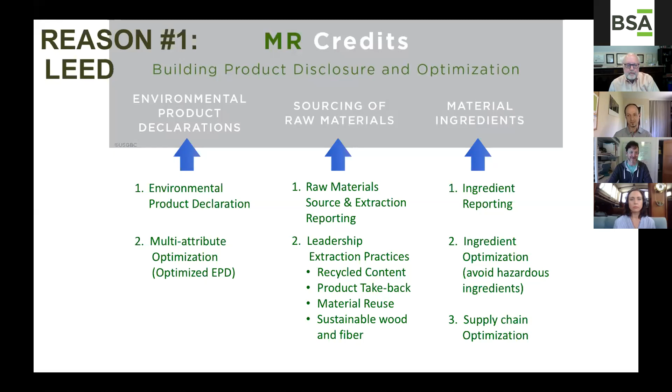Collect those EPDs. Used to be 20 products—you had to get 20 products that had EPDs to get 1 point. They've actually lowered it down to 10. This is like the easiest point to get in LEED. So the number 1 reason, you can get a really easy LEED point. So collect those EPDs. That's this, if we look at our building product disclosure and optimization credits.

So I was the chair of the MR tag for LEED after the V4 launch, so we were the fix-it tag, trying to fix all the credits that didn't quite work. So version 4.1, a lot smoother, even easier on some of these. We want to make sure a credit that no one actually uses doesn't change the world, so we had to lower the bar on some of them.

So this bar right here, above that is your transparency credits. Below that is your optimization credits.

Environmental product declaration is the one where you just have to collect the documents. You have to know, and Chris will talk a little bit about this, whether it's for the whole category, or whether it's product specific—is it for ceiling tile in general, or is it for Armstrong brand ceiling tile? The latter being the product specific.

Now, the interesting thing was, if you look at the progression of LEED, environmental product declaration really in most ways replaces a lot of the old materials credits, which were then packaged all into one single point. This used to be like 4 credits in the old LEED 2009 version. It is now 1 credit, and it's really more about how the resources are extracted. It's not trying to be, which it used to be, a proxy for environmental footprint. We're now using LCA as our environmental footprint metric in the EPDs.

And recycled content, this is more about where do the materials come from, where are they going, sustainable wood and fiber. Environmental product declaration is really where we should be looking for this question: is this a low or high environmental impact product?

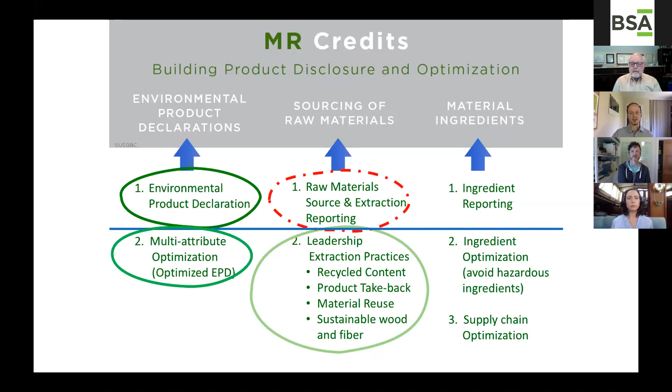Reason number 2, I said I was going to give you 3 reasons. This one is really looking at it from a manufacturing perspective. If you just produce the EPD to check the box for your customer and say, oh well, we got you your LEED point, go away—you are missing the biggest return on investment you could have, which is that doing LCA and doing the process of publishing your EPD creates some accountability if someone ever reads your EPD, which Chris will get into how and why not to do that.

But you should, if you do this right, this could be a huge source of value, because you know you have to do something about carbon now. You know you have to do something about the environment. Every company does. Where should you spend your money? Where are your hotspots of impact? What's the elephant in the room for your category?

If you make a car and you don't address fuel economy, but you make it out of recycled materials, you're really missing the hotspot. And for the most part, if you look at a product like ours, we make a thing. So talking about things versus machines is a really useful rule of thumb in LCA. A thing doesn't particularly use energy during use. So we make flooring, it sits there. You have to vacuum it, you have to sweep it. A little bit of energy resources gets used on that—not a lot, not compared to a car, where there's a huge amount, or an HVAC system, a huge amount of resources happening in the use phase.

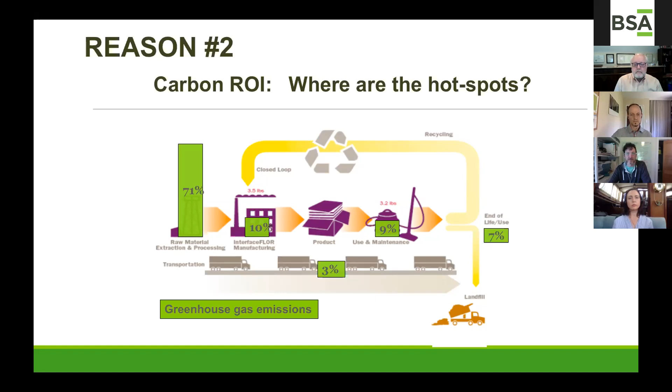So reason number 2, we're really talking about getting your return on investment. Focus your attention on where in the supply chain, where in your footprint you actually have the biggest impact. It means changing out, for most things, what you make your product out of. If you can't address the raw material sources and fundamentally change those, you're probably going to miss most of your impact.

This is the obvious one, and I'm going to frame it a little differently. This is the EPD, where you find a product's impact on climate change. And the trick here is we will get into some really dry stuff, especially when we get into the guts of LCA. And this is what needs to get you through emotionally: this really matters. This is where we find out what impact do we have or not have on climate change.

Because climate change is not just this abstract, oh well, we're gonna have some sea level rise and some hotter weather. It turns into, when you really run this experiment through, the biggest challenge to public health in the 21st century. CDC, World Health Organization, Harvard School of Public Health, whoever you ask, you can Google it - the #1 threat to public health in the 21st century, in spite of the global pandemic we're in, is still climate change.

Because it makes all of these other things worse. It affects so many things, it affects everyone. And then, of course, the other really important thing to consider is it doesn't affect everyone equally. It affects the most vulnerable people who can least afford to be disrupted by extreme weather or new disease vectors or failure of agriculture. It does not affect people equally.

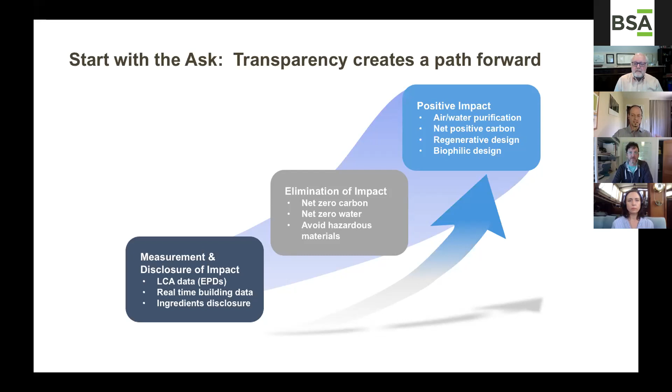Because what these details start us on—if we look at LCA, something as a little bit dry as LCA data, start to get this disclosure in our EPDs, we can actually get on a path to designing the world we want. We can get to, let's eliminate, we know what those negative impacts are. We've got the EPDs and other tools. We can reduce the negative impact, but then we can really start to, in a grounded way, work on designing spaces and buildings that have a positive impact on the world, where we are actually storing carbon in our building. We are purifying water. We are producing more energy than we're consuming. We're creating habitat in our buildings. But it has to start with transparency and a real assessment of where we are now, which is one of the key things that LCA enables.

So EPD, we're going to dig into—these are wonderful slides that I borrowed from Terry McGusky, who presented this at the American Center for Life Cycle Assessment Conference. It's a truly deep dive into life cycle assessment, which is now taught at just about every university, come a long way in the last 25 years.

So you'll see in LEED documentation and other places, it has to be a product-specific type 3 environmental declaration. An EPD is by definition a type 3 environmental declaration. You don't have to ask for your EPD to be type 3—an EPD is a type 3. And type 3 just means it's not a green claim. It's not like '30% environmental,' it's not like 'certified to meet this standard.' Those are type 1 and type 2 declarations. A type 3 just means we're going to give you all the data in a standardized format. It doesn't actually make any claims. It's not more environmental because it has 'environmental product declaration' in the name. It just is fully disclosed data according to life cycle assessment. That's all type 3 means.

So steps to create an EPD—there is a much deeper dive if you are working with manufacturers closely or work for a manufacturer, I can give you the full detail on this. But essentially I want to define the key terms so you know when you ask manufacturers for EPDs, which as designers is one of the key things we really need you to do right now. If people don't have them and they're not on this journey, they need to start tackling LCA, understanding their hotspots, transforming their supply chain. But they can't do that if they don't actually have the data. And you can't assess their product if they don't have an EPD. So keywords here: we need a PCR, we need an LCA, we need an EPD.

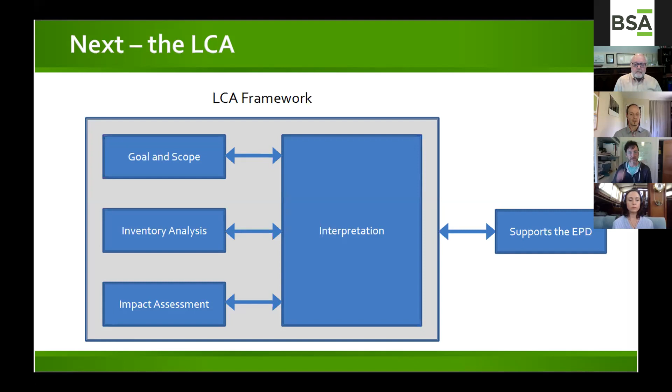That's where tools like GaBi and SimaPro, these other things, come in - the better tools have really good data sets, saying, well, here's what an average North American vacuum uses. Then the product category rules define what the maintenance frequency is for that product. So using this data for what the emissions from powering a vacuum are, I'm going to say it's once a day, and then we multiply that, and that's your impact for maintenance.

So you can see you have to layer in the data set - for instance, we say, okay, we use this kind of plastic, here's a data set from the production of this kind of plastic in your region. Ideally it would be from your plastic supplier, but a lot of people - and this is where we as manufacturers have to do the same work of asking for LCA from our suppliers that designers need to do - need to say, I need your actual data. We've done this with our suppliers, and it makes a big difference where we suddenly realize their hotspots, which become our hotspots. Okay, so your recycling machine is actually on a coal-fired power grid - what can we do about that?

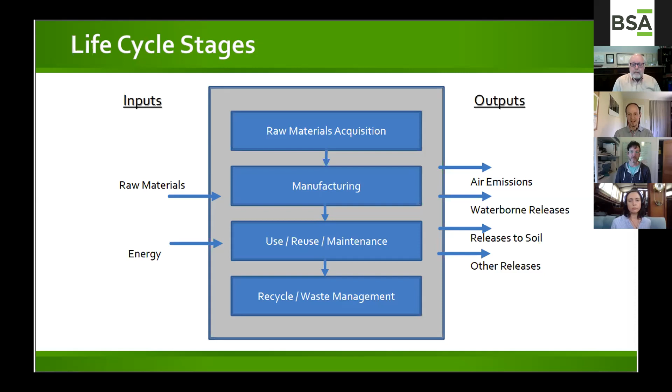Mikhail, two minutes, thank you. I'm running behind as usual.

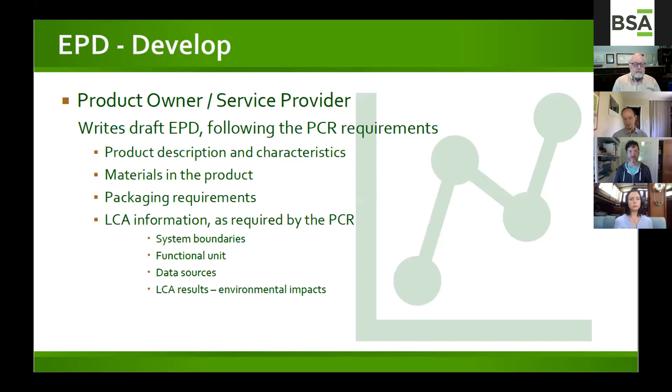Anyway, so PCR informs our LCA. Then EPD is really the format in which it gets published. You can either, as a manufacturer, do this yourself, or hire an outside consultant to do your LCA. You always need a program operator to publish this, and they're going to make sure your LCA has been verified, ideally by an outside party, but you can also have it done by an LCA person internally - obviously it's better if it's an outside party. So hopefully these concepts make a little more sense to you now. The PCR is necessary to link an LCA to make it comparable, and the EPD is where it all gets published in a standardized format.

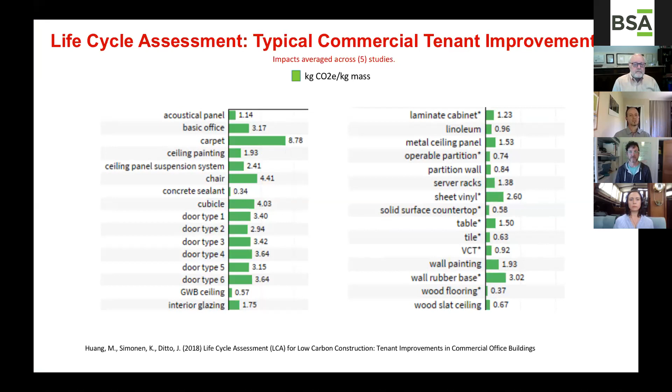And all of this enables us to actually start to look at building products and say, okay, what has a higher footprint? This is a great study that Carbon Leadership Forum did, averaging material footprints across five tenant improvement projects. You can look and see, oh wow, what jumps out at us here in terms of carbon footprint? Okay, carpet - I'm going to pay attention to that. Then we can go and look at EPDs for carpet and say, alright, this could be high, so I need to make sure to really pay attention within EPDs. This is the kind of thing EC3 can hopefully help you with, so you won't have to read 20 EPDs and say, wow, some products in this category are really quite low and some are quite high - let's pay attention in this category.

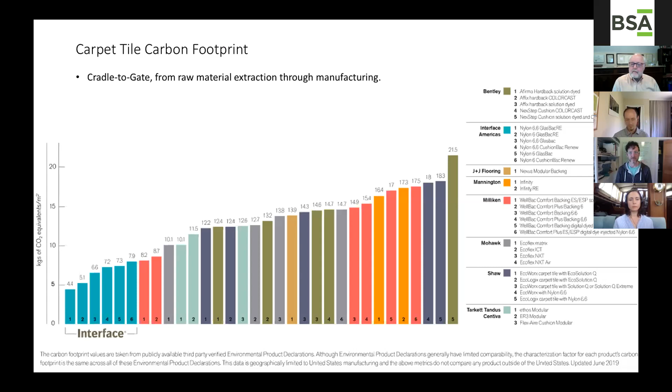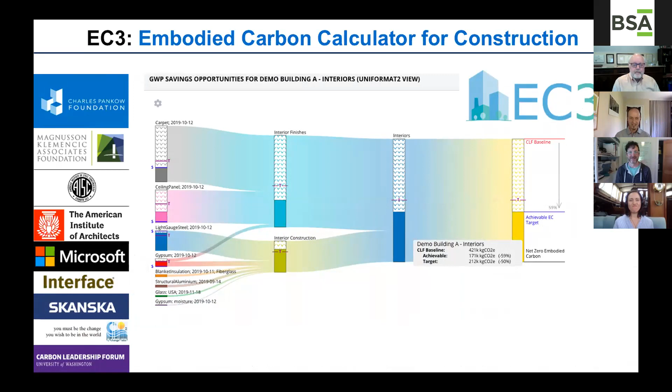So EC3 - if you are in the 9 product categories that are open in EC3, this can help you with that final stage of product selection so you don't have to read EPDs. Because ultimately, as a designer, that's the thing you want to not have to do - read EPDs. Chris is going to give you tips if you do decide to be that brave person who does. But all of these sponsors have realized, wow, we really want to not read EPDs, so we're getting lots of good sponsorship and partners for the EC3 tool, because it enables that process to be automated, and all you get to see, as Stacy pointed out last seminar, is what's better than what - for the product I'm specifying, where are my low, medium, and high carbon options? So buildingtransparency.org - if you haven't played with the tool, do.

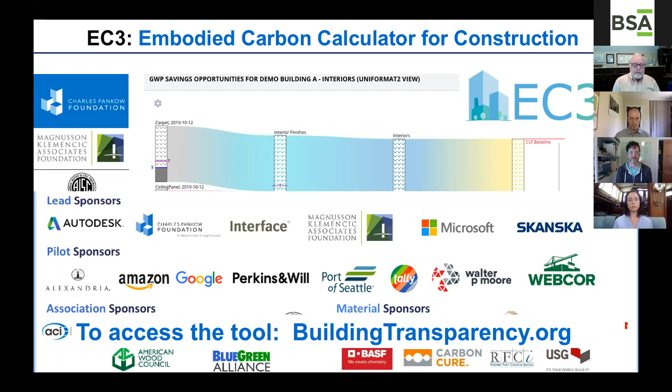This is another one I'll quickly show you, the qualitative version. If you really aren't going to tangle with EPDs, you can still reduce embodied carbon using materialspalette.org. There's only certain product categories they've given guidance for, but some key ones, so you know your general rules of thumb, spec this, not that. You don't know numbers, but you can at least get qualitative guidance and get them going in the right direction to reduce embodied carbon.

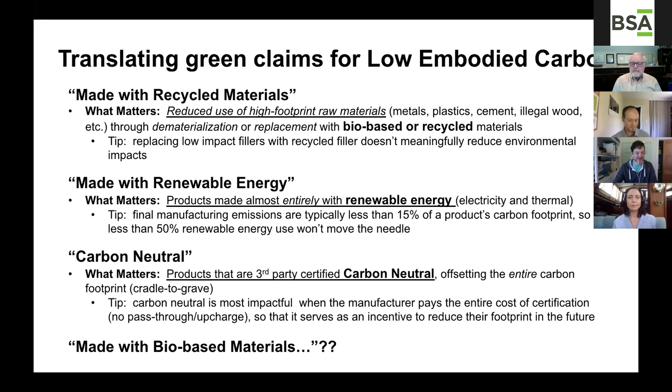Okay, thanks, Mikhail. That was great. You left me in a great spot, so I'm excited to take over.

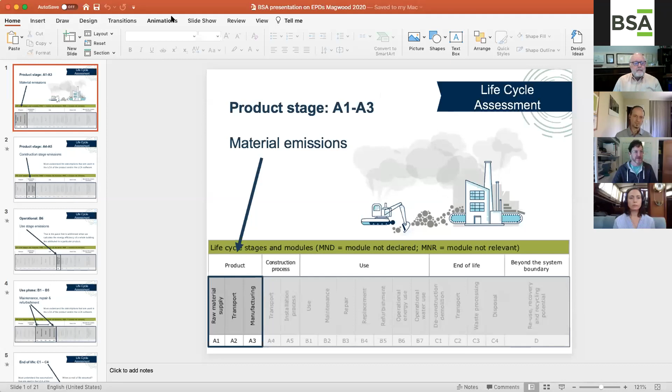I think you have to stop sharing your screen though in order for me to share mine. I believe that I did - I did hit the button. We might have a little delay. Okay, there we go. Is that coming through for everybody? Thank you, yes, terrific, okay.

So I have a set of slides, the first of which I'm going to go through fairly quickly, but to give everybody a grounding on what information you'll find in an EPD. So like Mikhail said, an EPD is a way of reporting the results of a life cycle assessment. The life cycle assessment does what it says - it looks at the entire life cycle of a product.

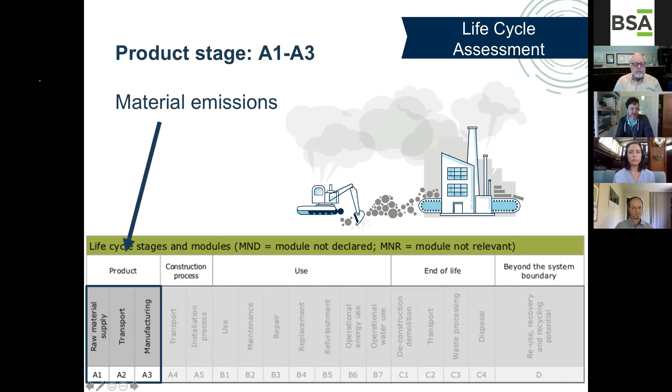Within the EPD, the various stages of the life cycle of that product are reported on separately, so you can compare not only the total number for the whole product, but by phase. They're broken into categories. The product stage, cradle to gate, as Mikhail said, known as stages A1 to A3, is raw material supply, transport, and manufacturing - basically the material emissions. That's the piece Mikhail pointed out as being quite large, especially the raw material supply portion.

Then there's construction stage emissions, known as A4 and A5. This is what it takes to transport those materials to your job site and the emissions associated with actually building the building - whether that's running diesel generators, running cranes, those sorts of operations, that's included in A4 and A5.

The one thing I want to point out is that the product phase is relatively straightforward to assess in an LCA, because those manufacturers all along the phase have pretty good data. You can collect quite sound data on the raw material supply, the transport to the factory, and what goes on in the factory.

When you get to A4 and A5, an LCA has to make a lot of assumptions. For transport, it has to assume where the factory is, but you have to generalize about the average distance it might get shipped. If there's an installation process, they'll assume you're doing it with a certain kind of equipment, or that it takes a certain length of time. So if you really want to do a good analysis for yourself, you want to understand what the assumptions were in A4 and A5, to get a sense of whether you'll have similar impacts to what is being assumed here.

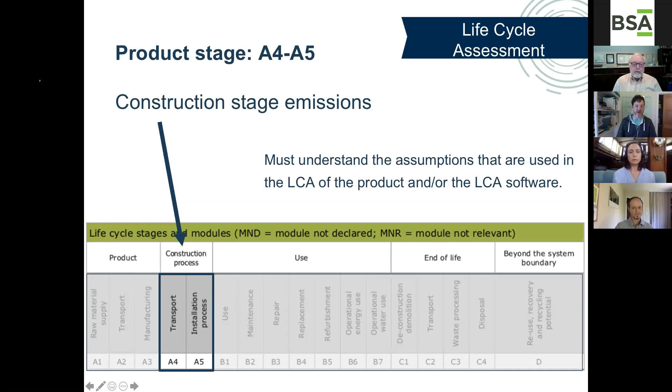There are use stage emissions, and when we're looking at just products, comparing different products, the operational energy use isn't really part of that. In Mikhail's example, the carpet doesn't have an operational impact. You don't heat the building more or less because of the carpet. The carpet doesn't require any operational energy over its lifespan in the building.

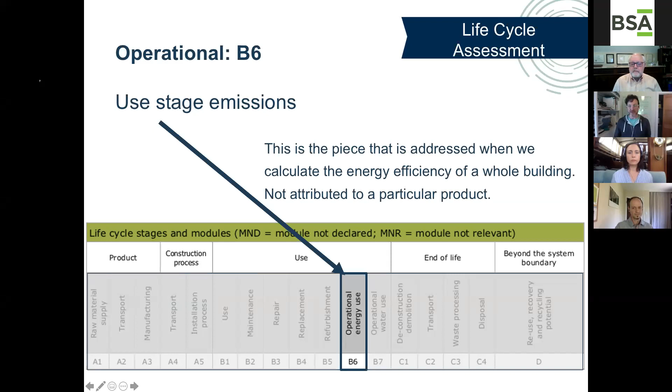So when we're looking at products, we're excluding the B6 category. What we are looking at is B1 to B5 - that's use, maintenance, repair, replacement, and refurbishment. You do want to understand what the assumptions in that life cycle assessment are - everything from how often maintenance happens and what kind, what the repair cycle will be, how often the product needs to be replaced. All of those things are going to be based on reasonable assumptions, but they will be assumptions.

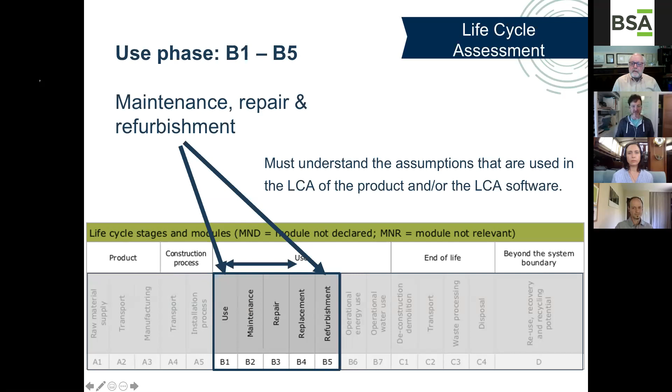So if you want to understand what you're seeing in this EPD, you'll want to see in the guts of the EPD what those assumptions were.

Same goes for end of life. First, an expected lifespan will be attributed to the product. Then C1 through C4 looks at what happens at the end of life - the emissions associated with deconstruction or demolition of that building or material, the transport of that demolition material, waste processing, and disposal. And you'll see this is starting to become a bit of a habit, but again, there are a whole bunch of assumptions built into that life cycle assessment.

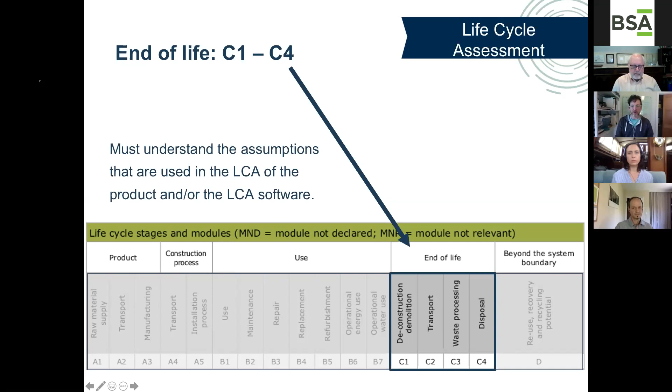For instance, whether materials are going to go to landfill, whether they're going to be incinerated, whether the LCA is attributing a portion to both of those means of disposal. So there's a lot to know there too, if you want to be able to compare.

And then finally, there are beyond-the-boundary impacts, largely to do with impacts from recycling and reuse. A material that is able to be recycled is, say, offsetting the need for more virgin material, so it'll be given a credit at the end of the boundary system here.

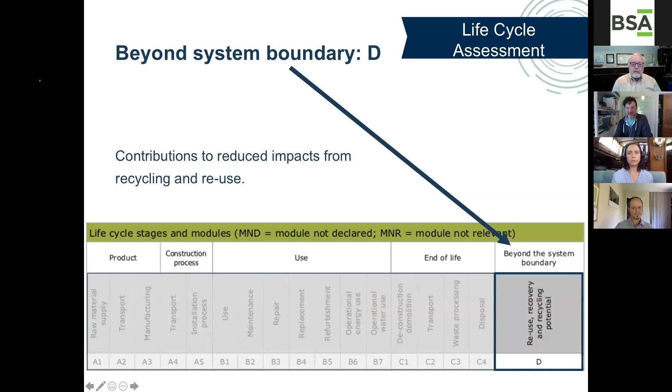I went through that because it's really important that you understand as a practitioner what part of this scope you are trying to compare for your analysis. So if you're looking at an EPD, is it to understand your product level impacts? Is it to understand your use level impacts, your end of life impacts, all of them together? Do you want to be able to weigh them out separately?

You need to know that because you'll find some EPDs only cover A1 to A3. So if you're looking at that EPD and comparing it to one that has A, B, C, and D all shown, you can really only compare A1 to A3 between those different EPDs. Understanding what you want out of that assessment and what you'll find in the EPDs you're looking at, you want to make sure that all of that aligns so you're scoping this properly.

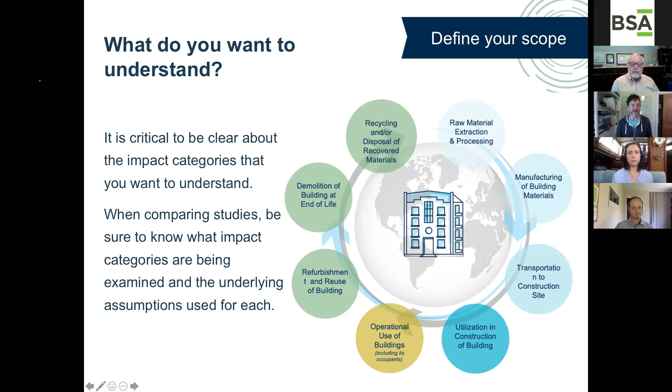So Mikhail sort of explained what an EPD is. From the climate point of view, when we're looking at a carbon analysis of a building, we're looking at the global warming potential, or the GWP factor. That's one of 7 categories that are assessed in an EPD. So if you're thinking about climate change impacts, you're really only looking at one of 7 ways that these products are being assessed.

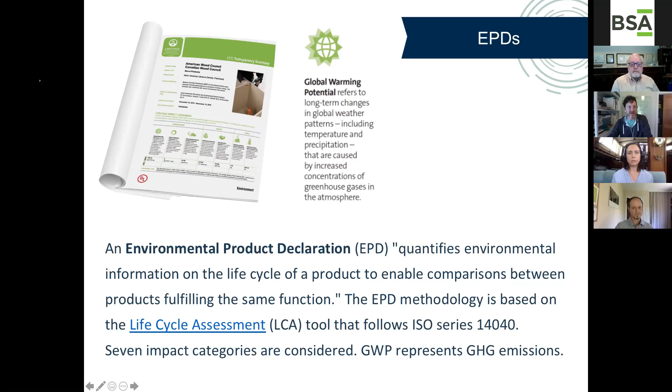And again, Mikhail mentioned that EPDs are third-party verified, and that there are program operators who do this for manufacturers. There are a bunch of them in North America and more in Europe and other places in the world. And if you're looking for these EPDs, in addition to places like the EC3 tool, all of these providers usually have a database on their website so that you can search out the EPDs that they've done.

So if you actually decide to wade in here and start reading EPDs, the first thing to look at when you see the document is whether it's an industry-wide EPD or a manufacturer-specific EPD. A lot of what exists now in North America are industry-wide EPDs, and the one you can see here is North American Softwood Lumber. This is both the American Wood Council and the Canadian Wood Council, who collected data from mills all across North America and presented an average for all softwood lumber everywhere in North America.

And so that in some ways can be really useful because it can tell you a lot about wood as a whole product category, but it's not particularly useful at directing you towards which wood might be better than other wood. This is sort of giving one number for wood in general.

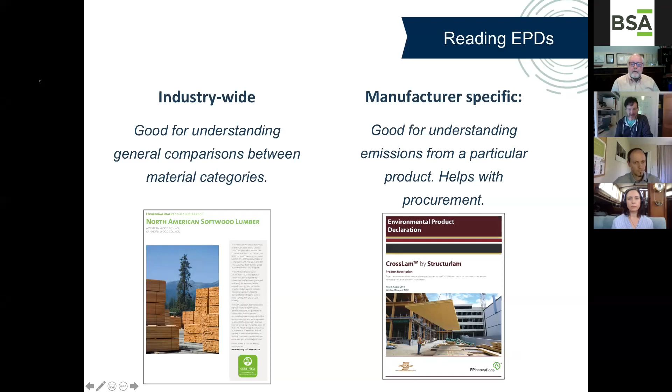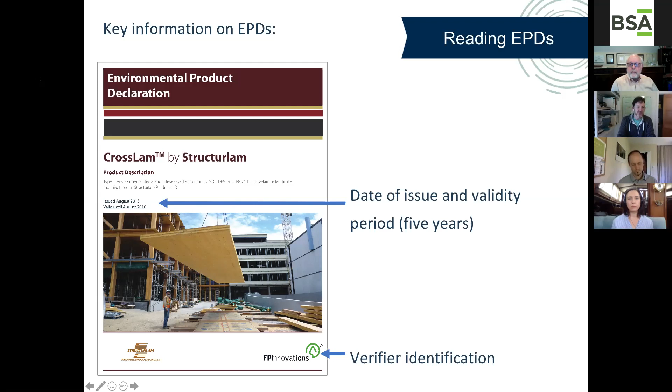So some key information when you're looking at an EPD: first of all, they have a 5-year validity period, so you want to check the date. You'll notice the one I'm showing you is actually an out-of-date EPD. Because there was a flurry of these done in the early 2010s, it's not unusual to find a bunch of out-of-date ones, but if you see that the date has passed, you can try to look for the more recent version. And the verifier identification is usually front and center too, so that you know it's been done by a reputable party.

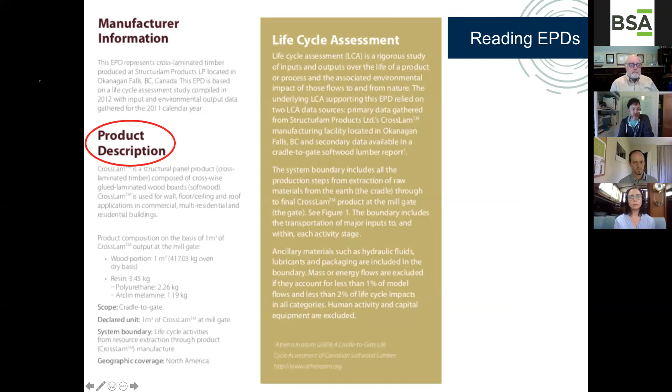Okay, so within the EPD, there is a product description that tells you where that product is used and where it goes. It gives you the scope of the EPD. In this case, we're just looking at a cradle-to-gate EPD. So when I was showing you all those different categories, this EPD is only addressing A1 to A3. So I'm not going to be able to use this to compare the full life cycle of this CLT to the full life cycle of another one. I'm only going to be able to compare it at that cradle-to-gate phase.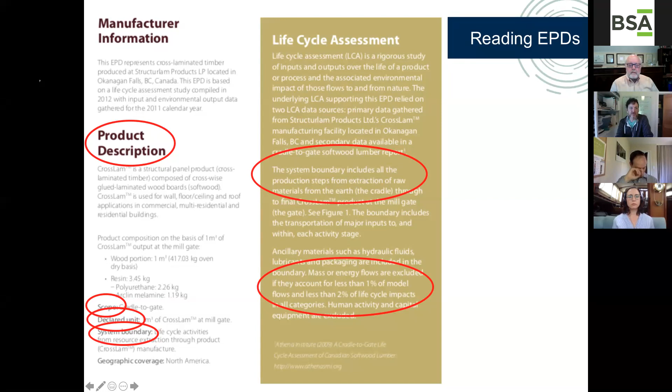It's going to give you a declared unit—in this case, it's a meter cubed of CLT. And it's going to tell you what the system boundary is, what parts of the input and output are being looked at here. So here they're defining that extraction of raw materials through to the final cross-lam product at the mill gate. And they're also going to tell you what's excluded. In this case, flows that are less than 1% of the total material flow and/or less than 2% of the life cycle impacts. So not absolutely everything in this process is being covered.

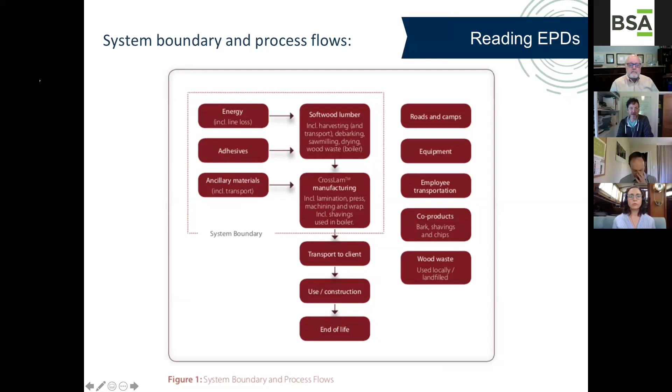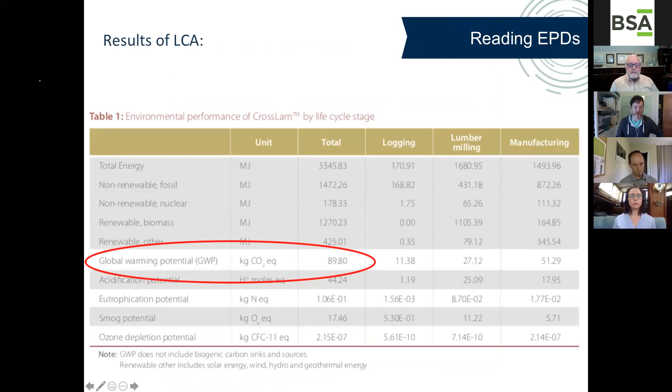And then there will be a results table that looks something like this. So if we're looking for the global warming potential, there it is. For 1 cubic meter of this company's CLT panel, it's 89.8 kilograms of CO2 emissions per cubic meter of CLT.

Kilograms of CO2e is the way to report the global warming potential of all greenhouse gases. Everything emitted in the manufacturing of that product is calculated and converted so it shows up as CO2. For example, 1 kilogram of methane is worth 34 kilograms of CO2. So when we're looking at CO2e, it's making it into a common denominator. Not all emissions are carbon dioxide, but if we change them into carbon dioxide equivalents, we're able to compare across products and across EPDs.

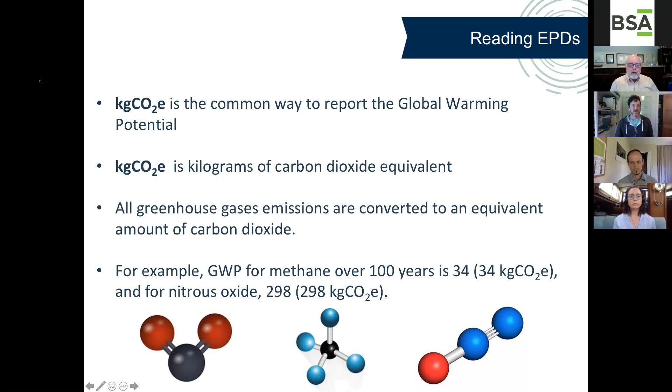I'll skip through this quickly, but if you're going to start reading EPDs, you need to know that because it's giving you a figure for a cubic meter of CLT, you can't really compare that directly to, say, a cubic meter of concrete, because to replace CLT with concrete or vice versa, the amount of material you need won't be the same. So you have to take that functional unit from the EPD and do your material takeoff to find the amount you'll need for your building.

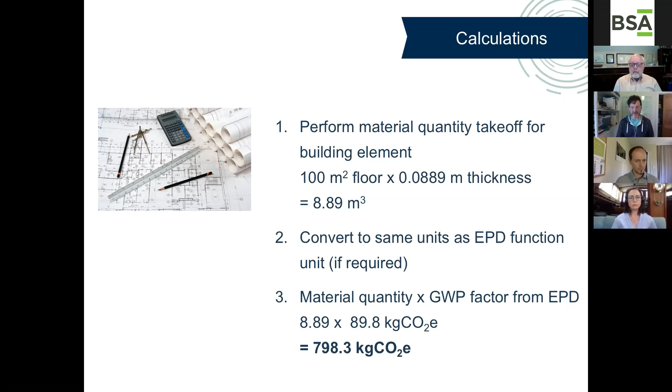To wrap up, that's how you'd do the calculations for every material that has emissions. If you want to look at materials that potentially store biogenic carbon, in some cases the EPD will give you that information. This CLT EPD identifies how much carbon was taken in by these trees while growing. For that cubic meter of CLT, there's 764 kilograms of carbon taken out of the atmosphere and stored in that tree. The actual emissions we looked at earlier would be subtracted from that so we end up with a cradle to gate net. So the amount of carbon in the material minus the amount of emissions it took to make the material results in net storage of 678 kilograms of CO2e per cubic meter of CLT.

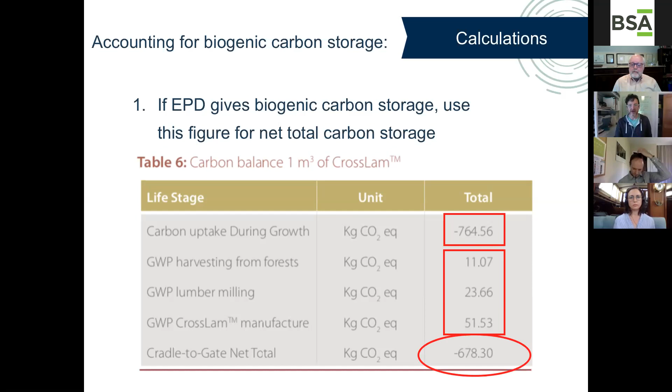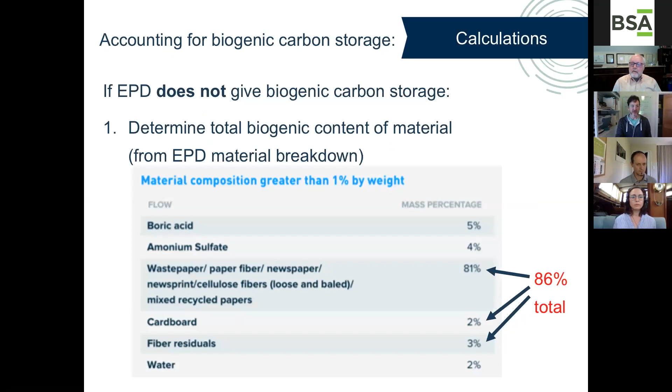If your EPD doesn't give that biogenic carbon storage, it's something you have to work out yourself. From the EPD you'll be able to see how much biogenic material was in the product. Here we're looking at cellulose insulation - there's 86% biogenic material. You basically go through the math yourself to figure out how much of the mass is biogenic, how much of that is carbon, and then convert that to carbon dioxide.

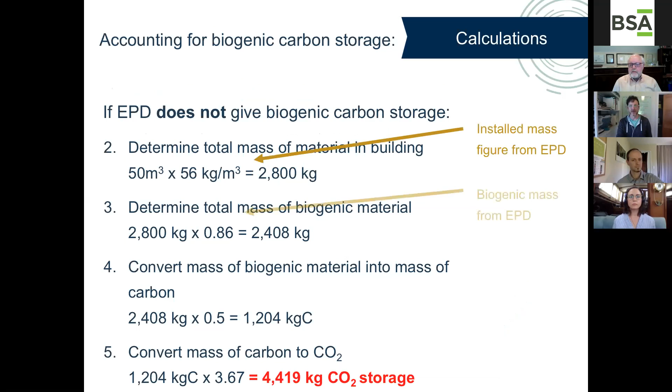And this is how you do it for straw. So that's great, hopefully that was fairly condensed, but a little how-to on reading an EPD for you. Thank you very much.

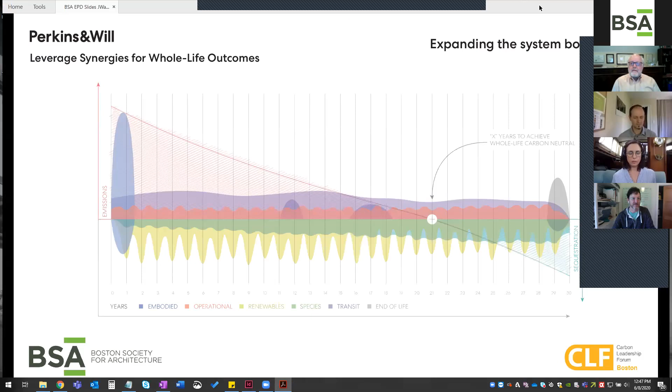Thank you, Chris. I would encourage everybody to check out the work that Chris is doing with biogenic carbon and some of his trainings to find out more. I'm personally really curious about how to quantify things like straw and timber. It's an area of research that is emerging and extremely important, and he's a great leader in it. And thank you very much, Mikhail, for making EPDs a little bit cooler, even though you said they're not cool. I think we learned some really important things from them, and in some ways, optimization is cool.

I'm Jesce Walz, I'm a designer at Perkins and Will. I'm based in our Seattle studio, and I'm here today to talk about EPDs, in part because we signed on about a year ago as pilot partners with the EC3 tool and building transparency. Our firm values research and practice as two things that correspond closely and inform one another, and we really saw the importance of having a database of EPDs that would be open source and easier to compare from one to the next. So I'm going to talk a bit about my experience with that.

This slide is exploring the design process in relationship to LCA. One thing to note is that whatever part of LCA we are designing for, whether end of life or operational energy and use, we end up having the outcome of our design go into the building at this point right here, somewhere between where a product leaves its gate and gets put on the truck to the building.

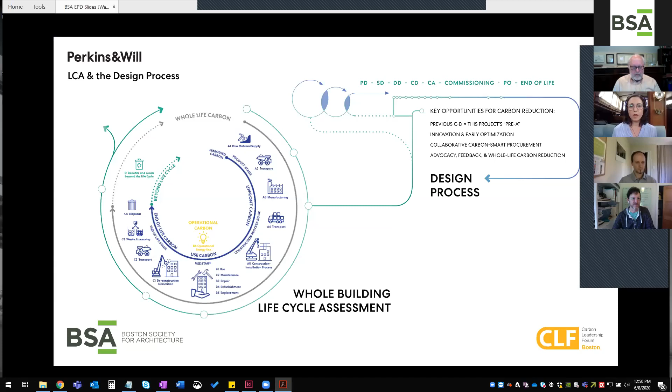Once materials are procured, a lot of the carbon story of the building has already been decided. So that's an interesting point. A lot of the design process is spent preparing for this moment when construction documentation is complete and procurement has happened. And if thought has gone into planning for the future phases of life, that may have happened already during pre-design through commissioning.

I'm wanting to take a moment here to put EPDs and thinking about life cycle assessment and designing for life cycle in the context of a couple of other areas of research. One is materials health, and as has been stated, materials health isn't necessarily a part of LCA. They've really become two distinct efforts, and while some life cycle assessment considers toxicity to humans or ecotoxicity as a category, it's pretty rare because of the amount of variability and thousands of chemicals that might be in a material.

So it may be better to look towards HPDs or material hazard assessments or third-party declarations for materials health. That said, the two processes have some things in common. There may be a system boundary or functional unit in EPDs and LCA. And in materials health, an HPD might reveal parts per million or declare what was disclosed and what wasn't. A primary difference is that EPDs are required to be verified, and some materials reporting standards are self-verified.

But their big similarity is advocacy, and for those of you who are part of the materials health movement or still are, you may be familiar with the process of calling manufacturers and asking for information and working towards market transformation, and EPDs are really a part of that same story.

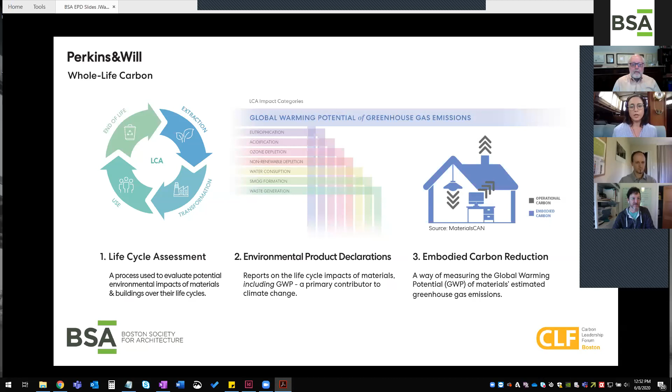Here we see everything in blue is the embodied carbon, and the gray is the operational energy. While they're two different systems, they come together to give us a picture of what could be called whole life carbon. Looking to make reductions and claims about being net zero or net positive or carbon neutral, we could start to think about these two things in conjunction.

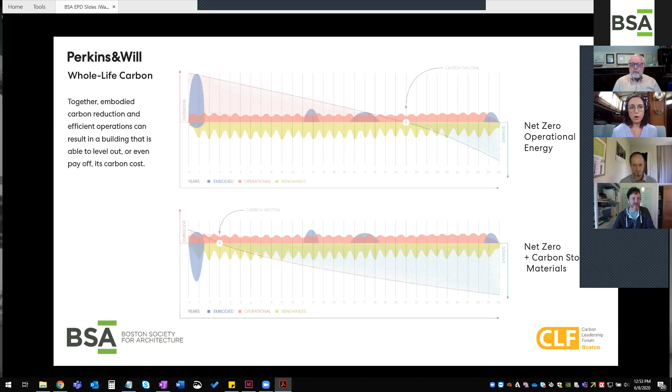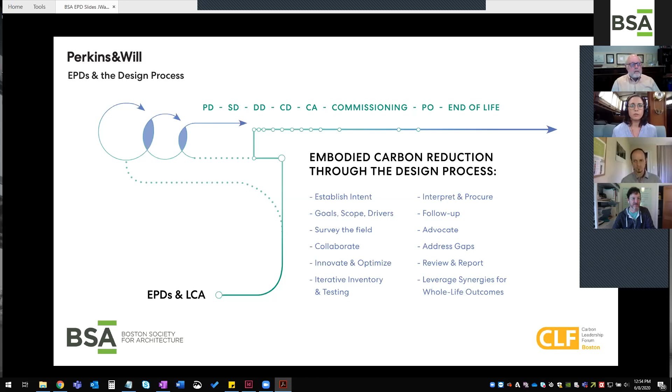So stepping back, what does the design process mean for EPDs, and how might we engage them in both a qualitative and quantitative manner? Here's some steps, and I have a couple of slides for each of these steps. The slides to follow are an expression of my own journey in learning how to use EPDs in the design process, and I've also cross-referenced them against tips from the Carbon Leadership Forum and World Green Building Council.

So a primary thing is to establish intent. I'm going to have to run through these steps fast.

What are the goals of the stakeholders, and how can we align around those to determine goals, scope, and drivers? What kinds of tools can support setting a budget and meeting that budget?

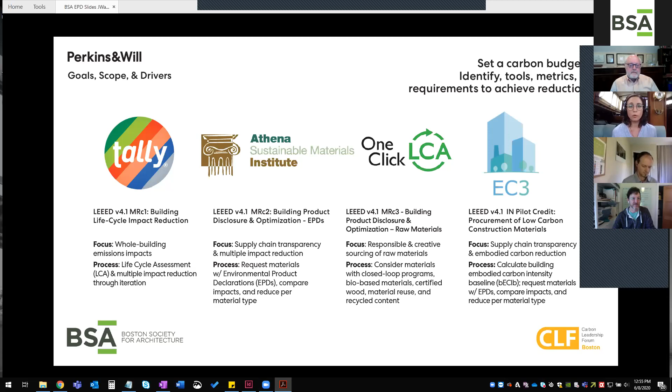Identifying a budget or benchmark to meet and improve from is a key step in embodied carbon reduction. If we don't have something to measure against, it's hard to know whether goals have been met. Here are a few standards and LEED credits.

An early step in the process is surveying the field. Here we can identify opportunities, constraints, resources, and availability of EPDs.

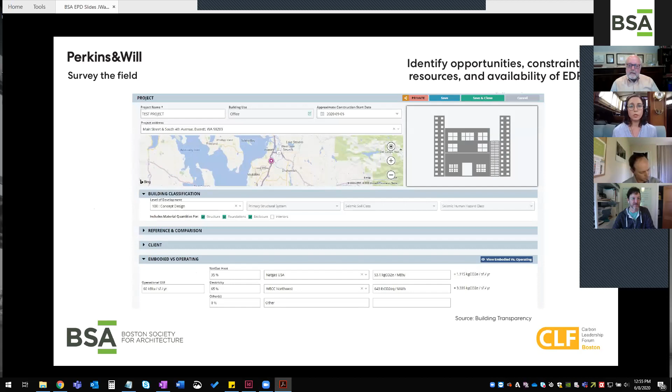A first step I would take is to go into the EC3 tool early on, even though it's used for procurement, set up a project and search for materials like cement mixes I might want to procure from nearby, just to see whether there are manufacturers in the area with those things.

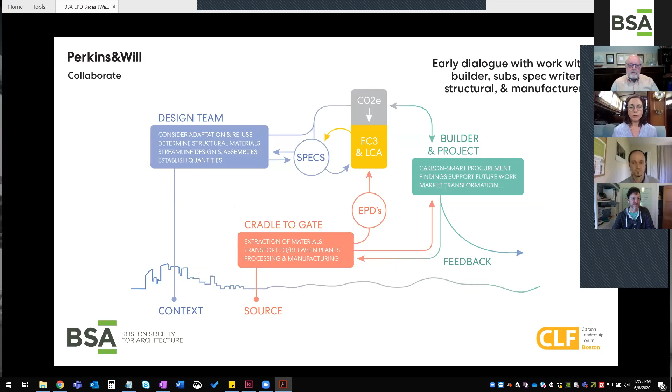And then following to collaborate and engage in early dialogue with builders, subs, spec writers, structural, and manufacturers. Within the design process, the EC3 tool and LCA introduce this point of conversation, and EPDs are a key entry point. Through the data they provide, we're able to assess and make comparisons and procure for the project.

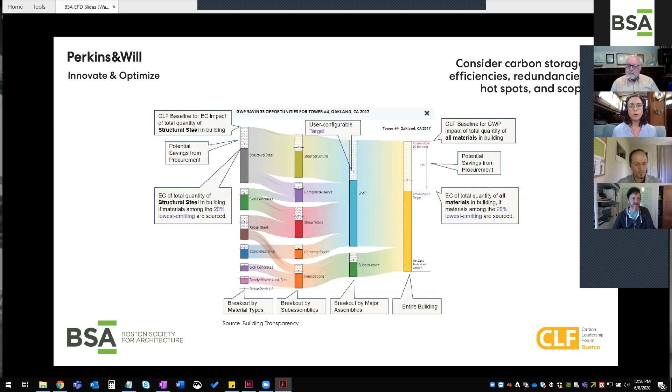Innovation and optimization are also key here. It is harder to compare carbon storing materials with the EC3 tool, but we can do self-calculations, as Chris was saying, and there can be different scopes of study, comparing entire building structure systems to one another for primary material types, looking for redundancies and hotspots.

And then iteration is also key. Inventory and testing are an iterative process that doesn't happen just at one point, but occurs throughout the design process, and it happens at several scales.

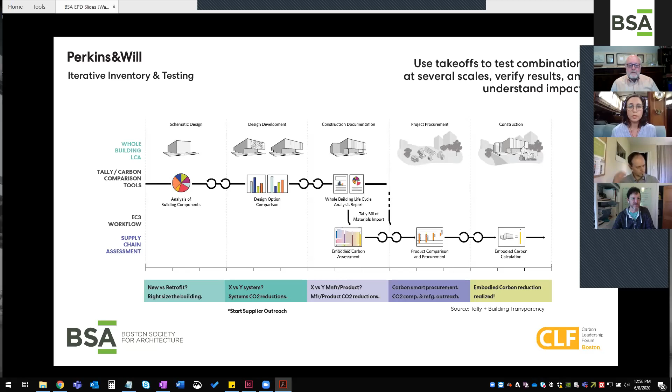So again, it could be the structure. It also might be assemblies, determining which materials make the most sense for an assembly's performance and carbon impact, or it might be material specific, which is where we get into procurement.

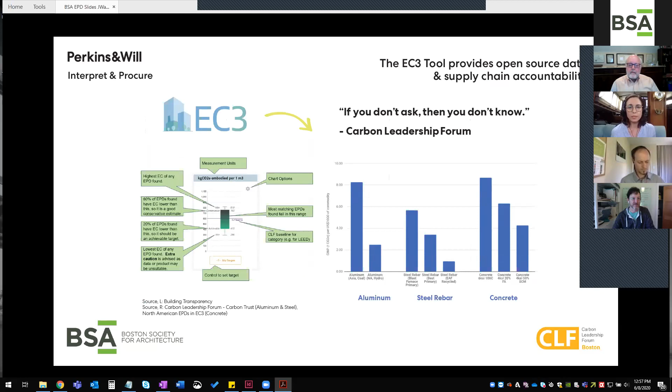Getting into the EC3 tool, it does a lot of work to help us enter procurement with some confidence about the variability between products, so that we know we can be making comparisons within one category. If we compare aluminum to aluminum, or one concrete mix with similar properties to another, we can really see what the carbon impact might be based on the work the tool makers have done to clarify declarations.

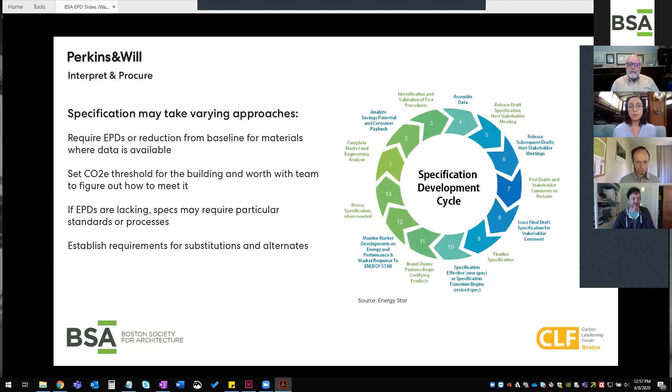I think I'm going to breeze through these, but this is a note about specification, and that is a complex conversation: how do we specify to ensure reductions?

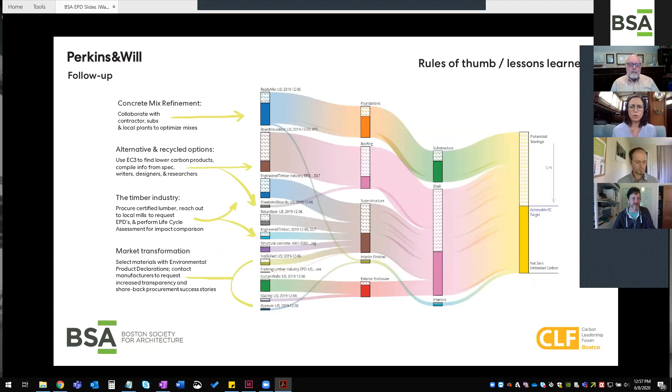Lessons learned as we go. It's important to take note of rules of thumb and consider how those might feed into the next project. The key one being market transformation: when we reduce per the rules we've learned and ask for more information, we see the market start to shift.

In order to shift the market, we have to have conversations, and here are some tips about speaking with manufacturers. A key tip is to demonstrate that this is becoming very competitive, and there are a lot of EPDs increasing in the online database for EC3.

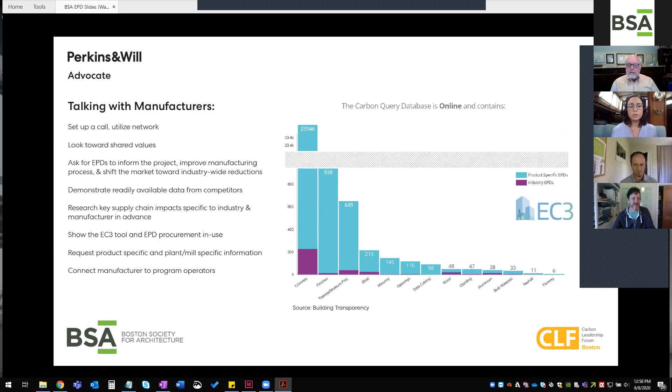Also doing a little homework doesn't hurt, because each manufacturer is going to be dealing with different upstream and downstream inputs, and they're going to have questions about how they can measure those. We can't answer all of those questions, but we could connect the manufacturer to a program operator.